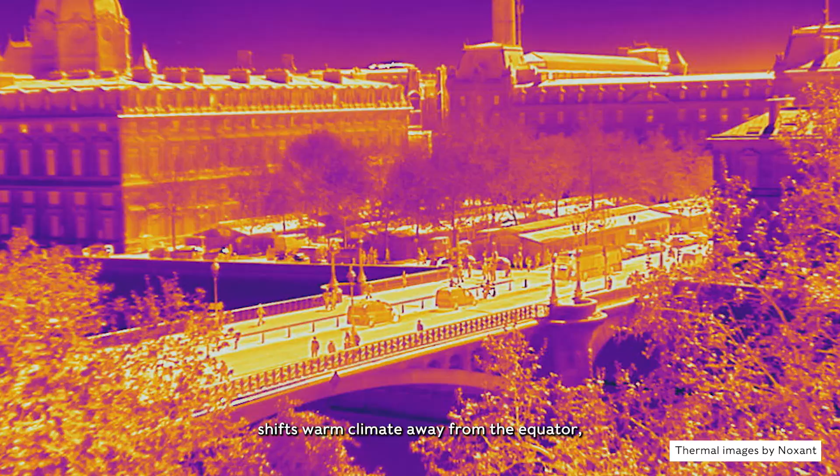But now, as human-induced global warming shifts warm climate away from the equator, these cities are forced to endure temperatures that are ever more different from those for which they were initially built. In 2050, it is projected that the climate of Paris will be comparable to the one of Sevilla in the south of Spain today. This means that Paris now has to develop unprecedented cooling strategies to respond to new scorching summers.

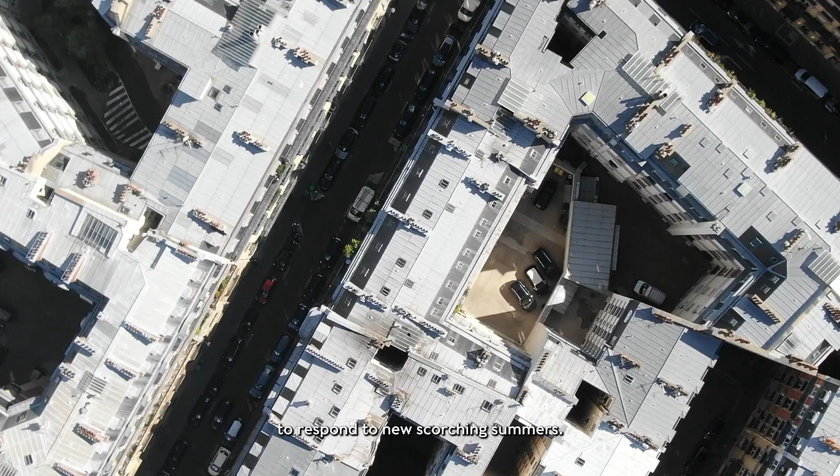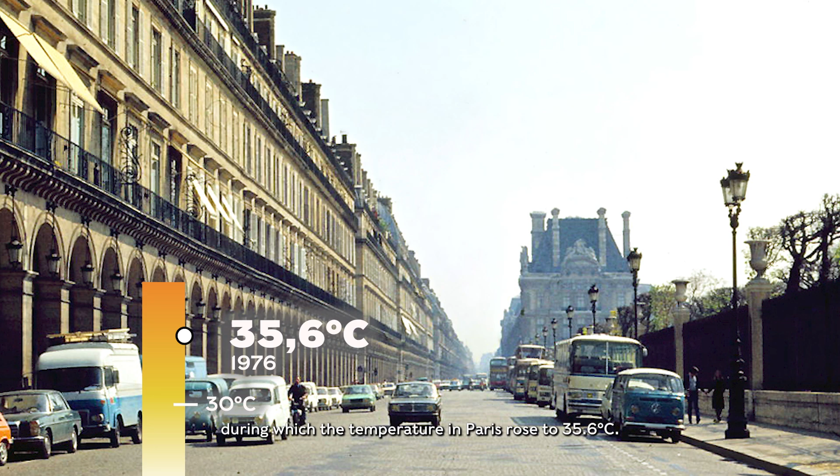For instance, one of France's most memorable heatwaves was in 1976, the heatwave of the century, as some put it, during which the temperature in Paris rose to 35.6 degrees Celsius. This can seem like a lot, but in the last 5 years only, the temperature in Paris rose 5 times above 40 degrees, with a peak at 42.6 in 2019. 7 degrees more than the 1976 heatwave everyone remembered.

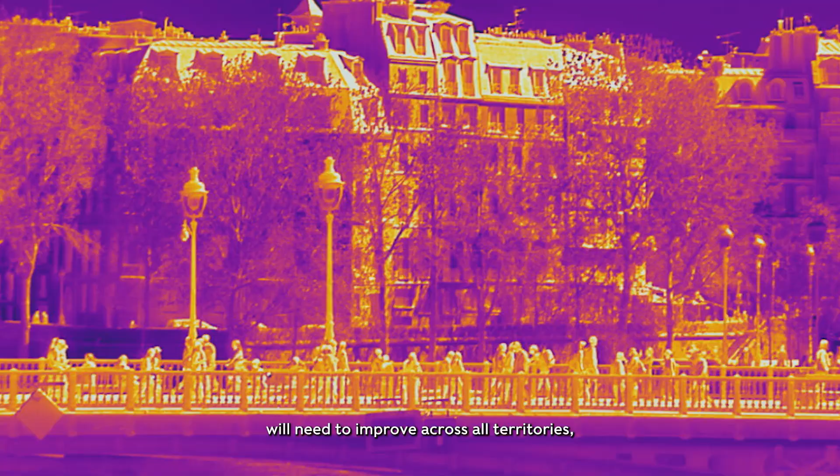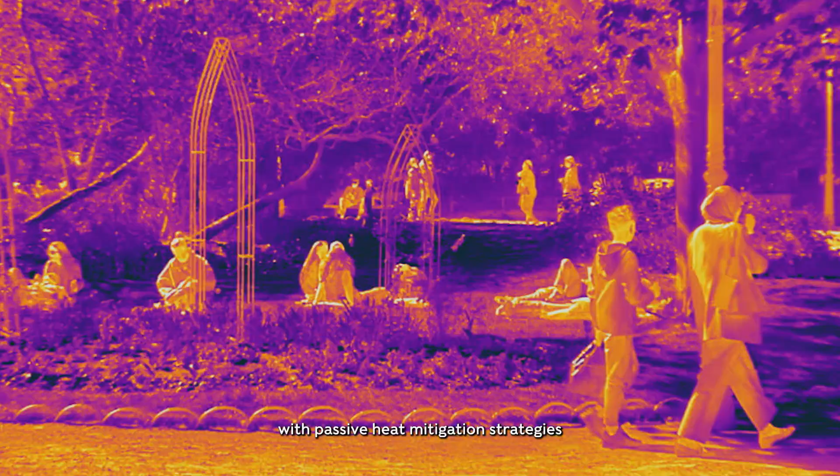While heatwave resilience will need to improve across all territories, it is even more critical for urban centers, as their materialities, geometries, and lack of vegetation trigger urban heat islands, soaring up temperatures to 10 degrees higher compared with surrounding rural areas. This reality calls for urgent climate adaptation, one that enhances cities' resilience with passive heat mitigation strategies, while limiting reliance on active cooling systems that reject heat outside buildings and worsen the adverse effect of heat waves.

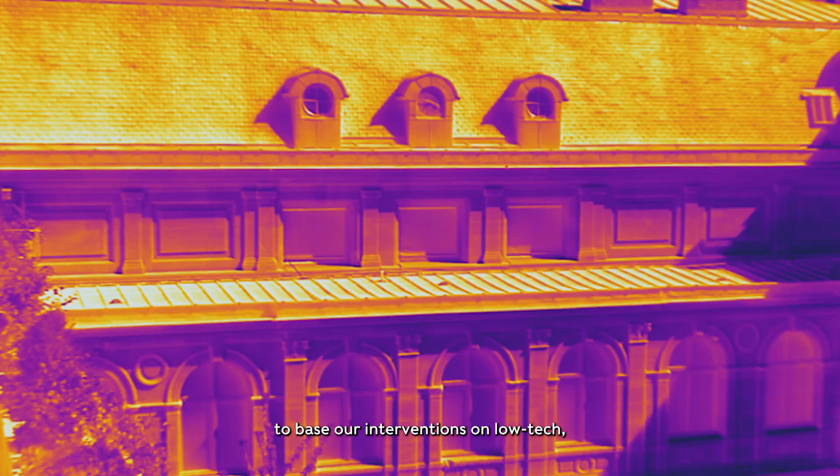Ever since we created Roofscapes Studio in 2021 during our studies at MIT, we have been researching, developing, and deploying passive heat mitigation strategies to base our interventions on low-tech yet effective thermal principles. First, we shade heat-absorbing surfaces in order to protect them from solar radiation, reducing indoor and outdoor temperatures. Then we plant ecosystems to create biodiversity corridors, and we further enhance passive cooling through natural evapotranspiration.

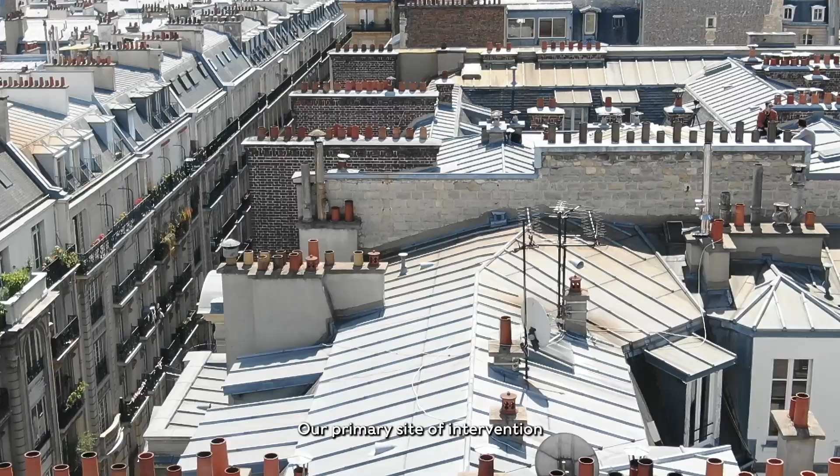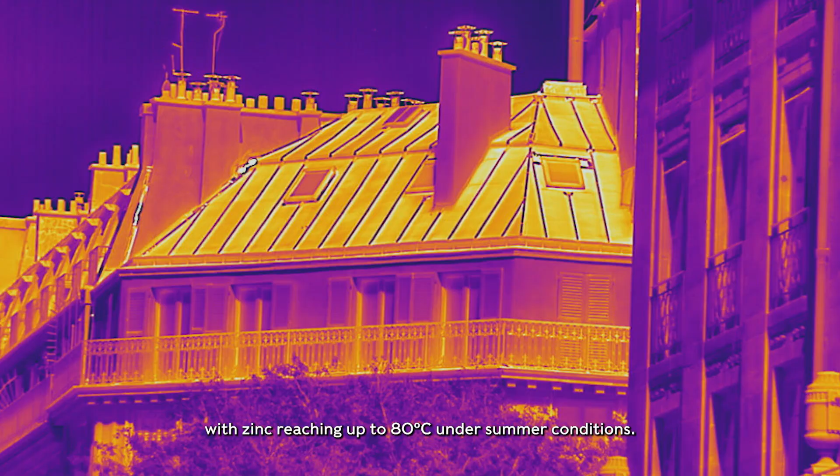Our primary site of intervention has been Paris' extensive roofscapes, where 4 out of 5 buildings have a pitched roof that typically contributes to urban overheating, with zinc reaching up to 80 Celsius under summer conditions. In partnership with the city of Paris, carpenter Mea Construction Bois and landscaper Topager, we deployed our first pilots of passive climate adaptation on a former town hall building, now hosting the Académie du Climat.

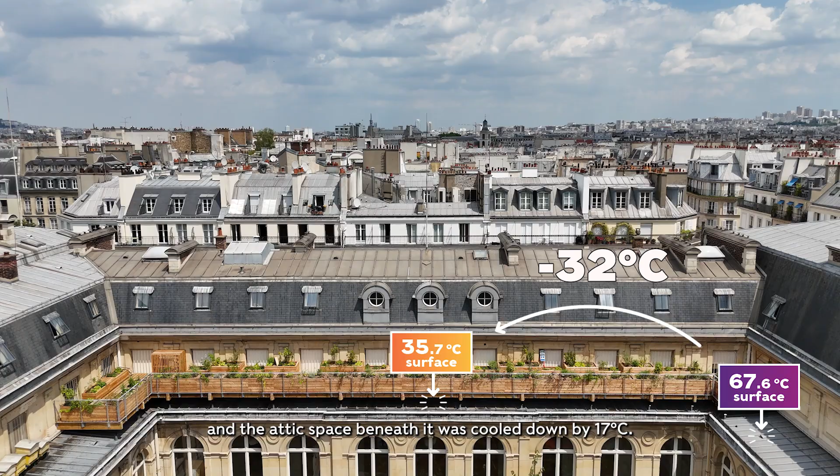In July 2024, during the first heat wave after construction was completed, the results we monitored were staggering. The zinc roof's surface temperature dropped by 32 Celsius, and the attic space beneath it was cooled down by 17 Celsius.

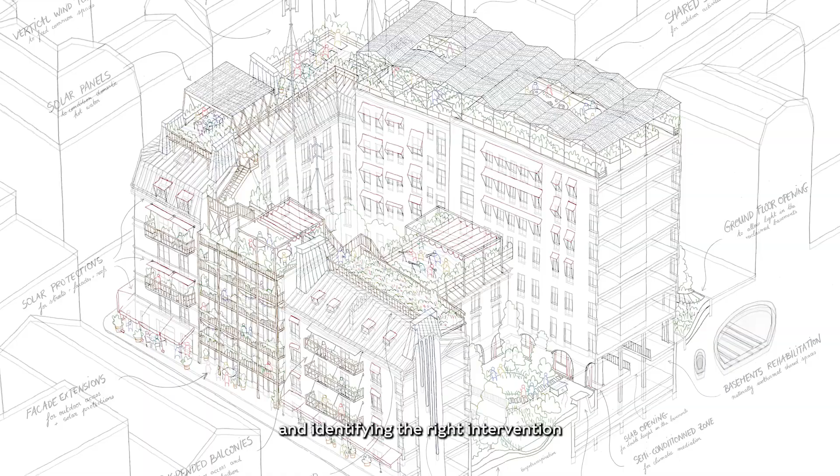Our approach for the climate adaptation of existing buildings is about finding tactical and non-destructive strategies to pass on our built heritage to future generations. It is about leveraging what is already there and identifying the right intervention to adapt it to different climates. We call this climate realignment.

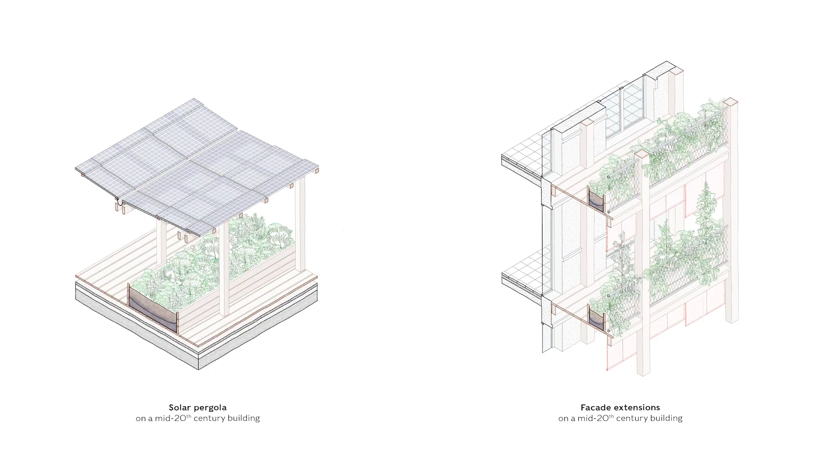For the roofs of Paris, it meant working with roofers, carpenters, and landscapers to deploy planted wooden platforms that protect roof surfaces from solar radiation. These platforms create shared gardens at the roof level, providing social and ecological benefits with minimum impact onto the underlying building structure. We are now collaborating with all types of private and public building owners to deploy such interventions across Europe.

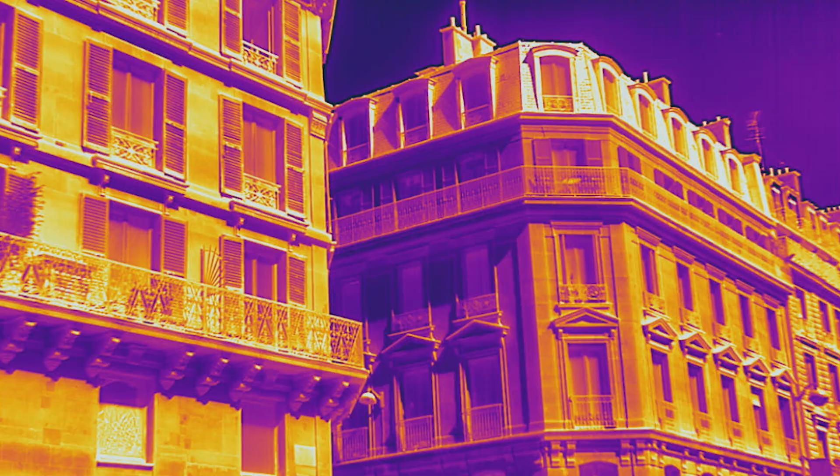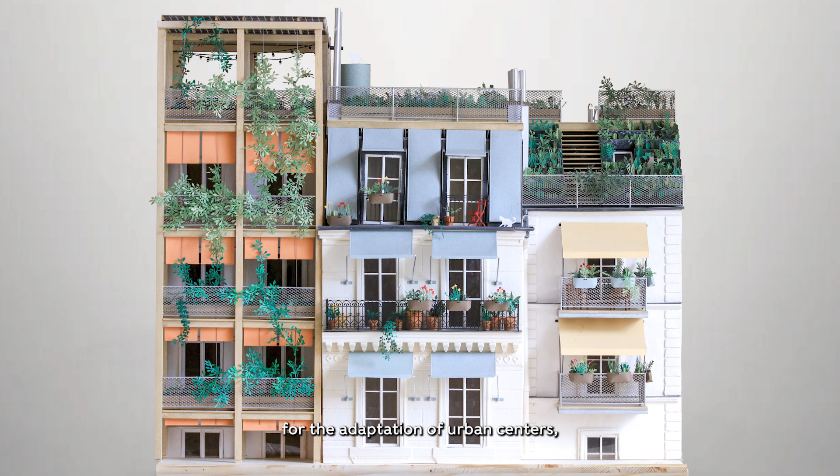As we're convinced that climate realignment doesn't stop at the roof level, we wanted to take the opportunity of the Biennale, one, to showcase other strategies that we've developed for the adaptation of urban centers, and at the same time immerse visitors in the realities of heat. One of the challenges of working with urban heat is that the phenomenon itself is invisible. To understand it and eventually to act on it, we need to sense it, we need to visualize it. We need to make the physicality of urban heat visible.

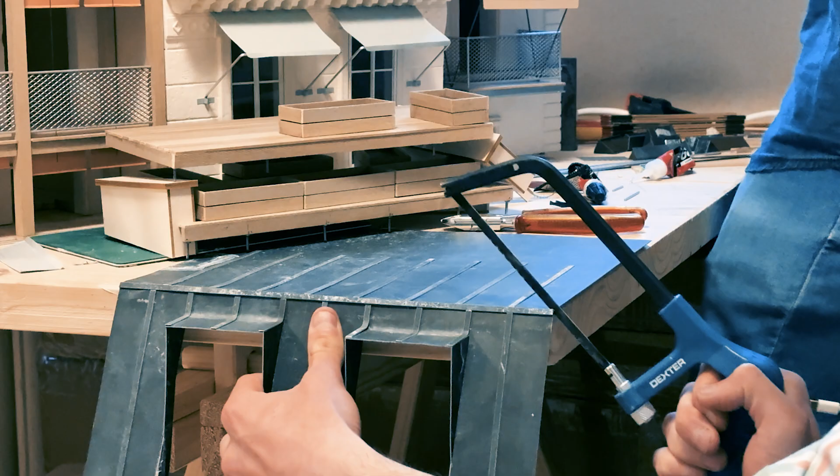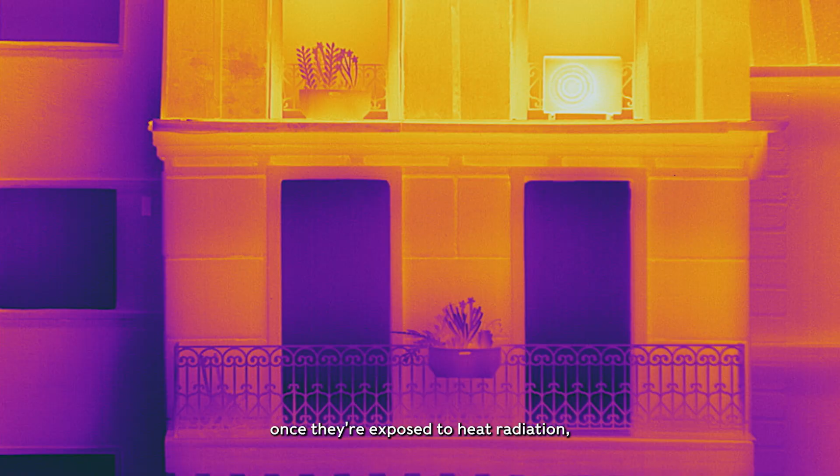This is why for the 2025 Venice Architecture Biennale, we decided to build twin models, each representing 3 building typologies that are ubiquitous in Paris. An early 19th century Faubourian townhouse, a late 19th century Haussmannian building, and a 20th century modern condominium. These models, made out of stone and plaster and zinc, and all the materials used in actual buildings, have real thermal properties, which means that once they're exposed to heat radiation, they behave much like their real-life counterparts.

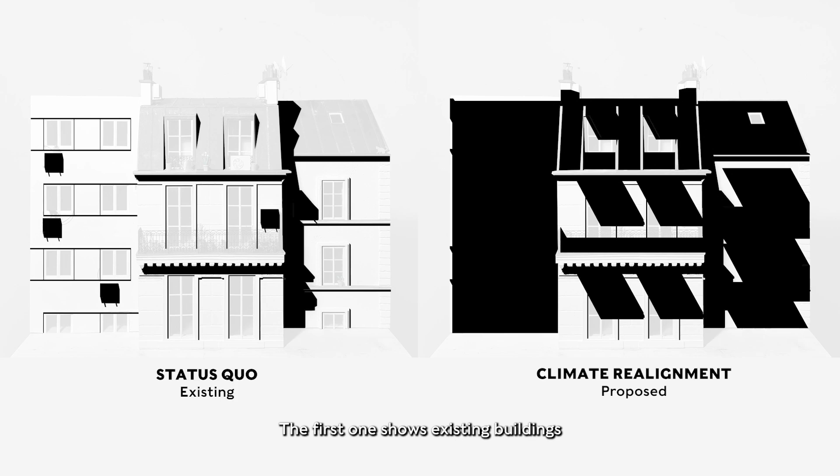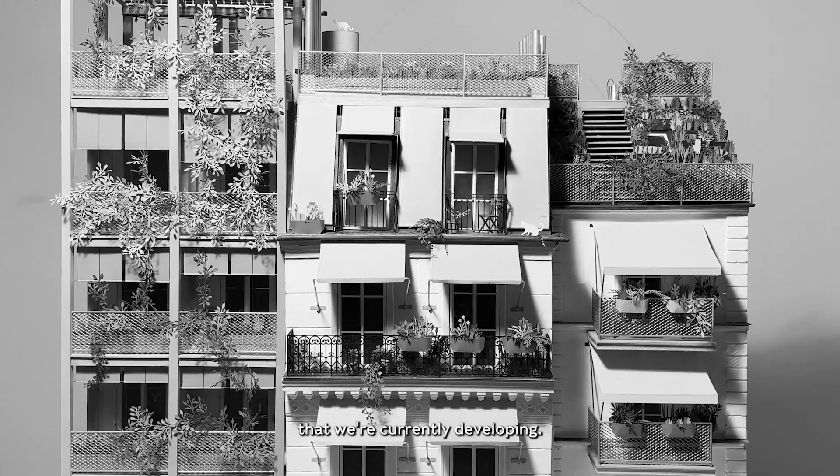These models illustrate 2 possible scenarios. The first one shows existing buildings if the status quo prevails as the sun continues beating down on our cities. The other features a range of architectural climate adaptation interventions that we're currently developing. Their comparison, filmed with thermal cameras, shows the impact of passive heat mitigation strategies. Shading balconies, vegetated planters, penthouse structures, curtains, creeper plants, solar panel canopies, water retention systems, and so on.

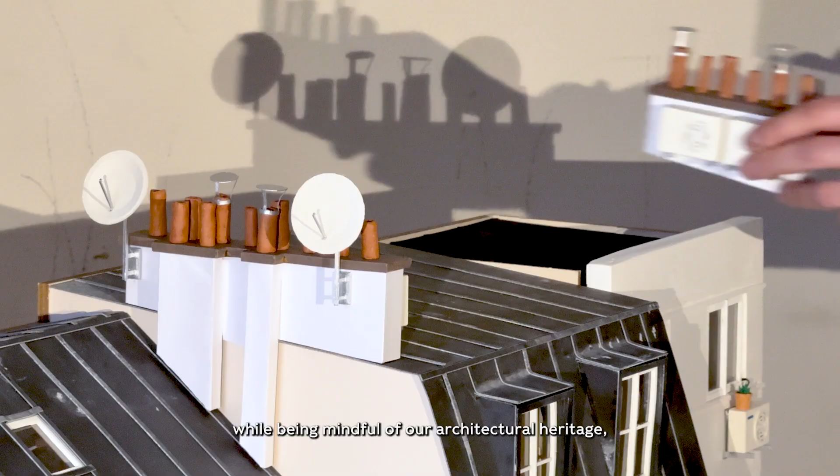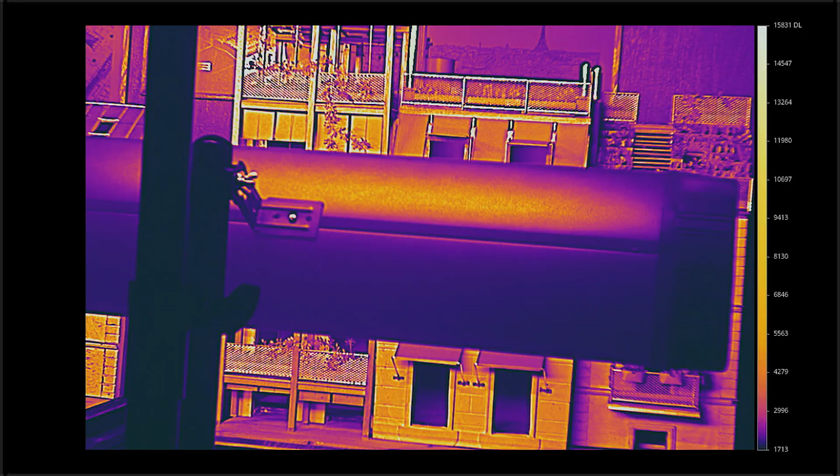To ensure that our cities can be adapted at the pace required by the climate urgency, while being mindful of our architectural heritage, it is necessary for architects to develop non-destructive, passive cooling strategies for both facades and rooftops. We believe that this experiment underscores a crucial message for architects and designers invested in climate adaptation. Our industry needs to investigate a new zone of architectural intervention, the 1.5 meter offset layer around the envelope of buildings subject to heat waves.

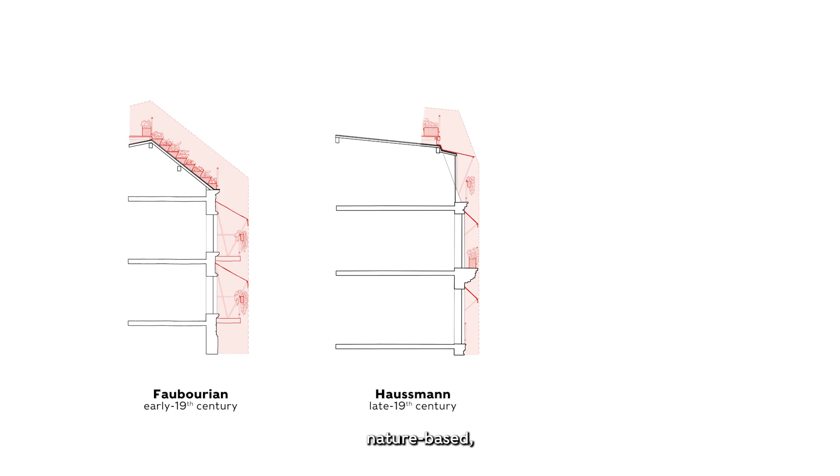More than ever, we need to deploy within this layer nature-based, low-tech, non-destructive, and scalable strategies to protect buildings and their inhabitants. We define this layer as our new site of architectural intervention, and it is this imaginary of climate realignment that we attempt to convey at the 2025 Venice Architecture Biennale.